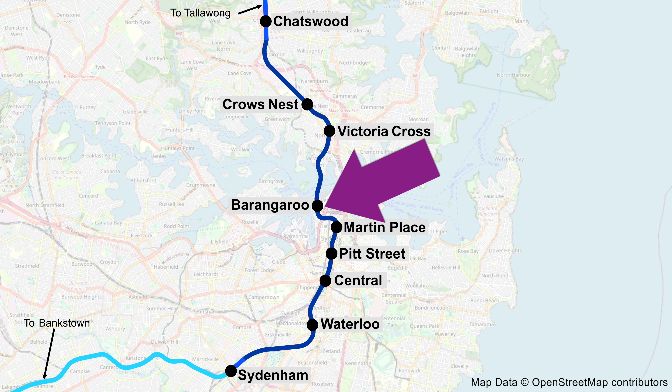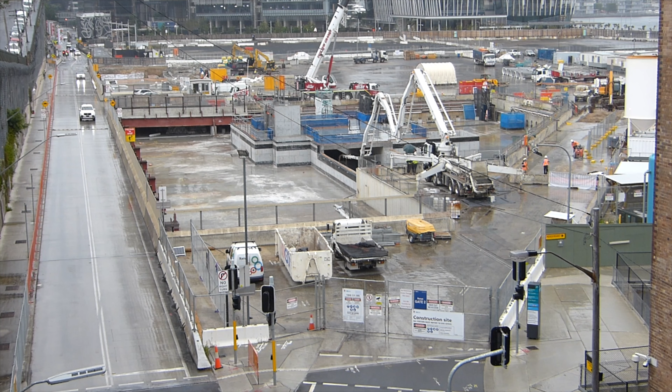Barangaroo is the first station on the south side of the harbour and is one of 4 stations in the central CBD area. Back in November 2021, this station had 2 distinct boxes that were separated by this bridge.

On the 26th of March 2022, this looked very different. The bridge has been completely removed along with the red girder that was supporting it.

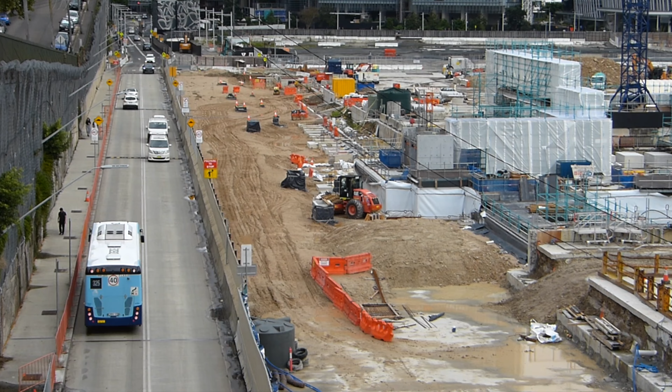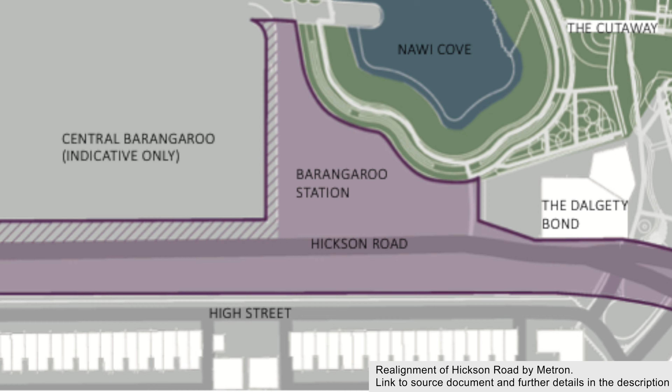The reason for covering the roof with sand is to enable Hickson Road to be realigned to run over the station box. Just before the High Street steps, Hickson Road will verge slightly left and then run over the station box. It returns to its original alignment just before the Munn Street Bridge.

The majority of the red girders that used to support the station box have now gone, but I did notice this one, which is supporting Hickson Road. I reckon that when Hickson Road is realigned, this one will go.

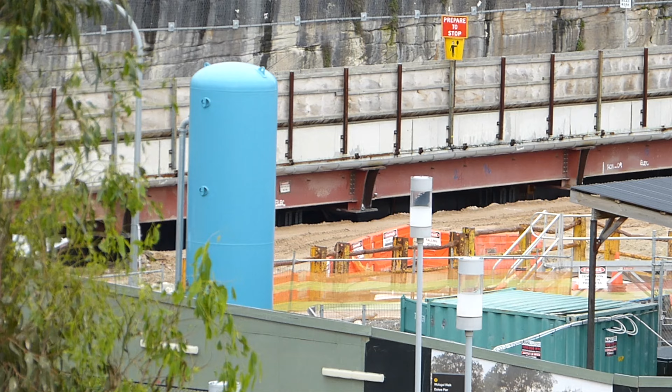Now looking down from High Street. Notice the surface water from the recent heavy rain.

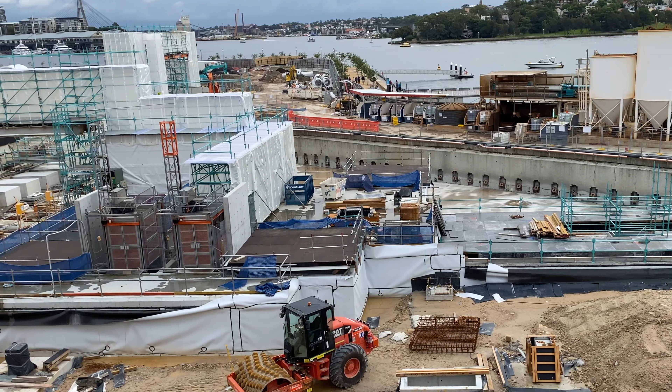This structure coming into view will be one of the station entrances. This is one of 3 entrances in total. I'll cover the likely locations of the other 2 entrances a little later in this video. This entrance will face north and have 3 escalators going down to the concourse below.

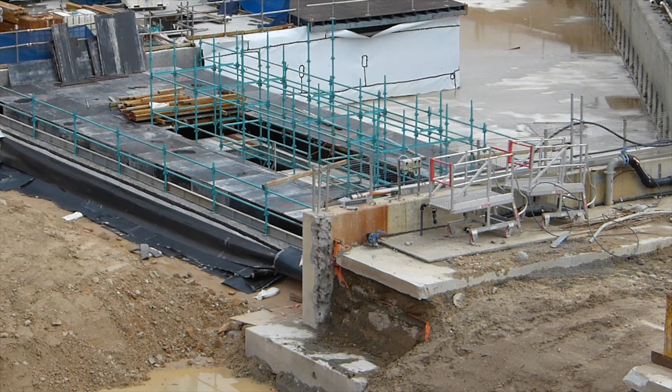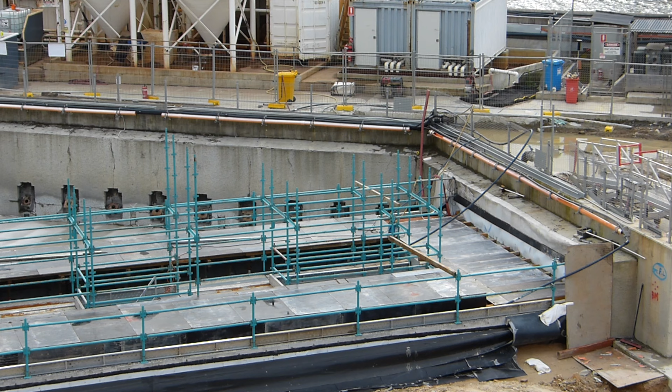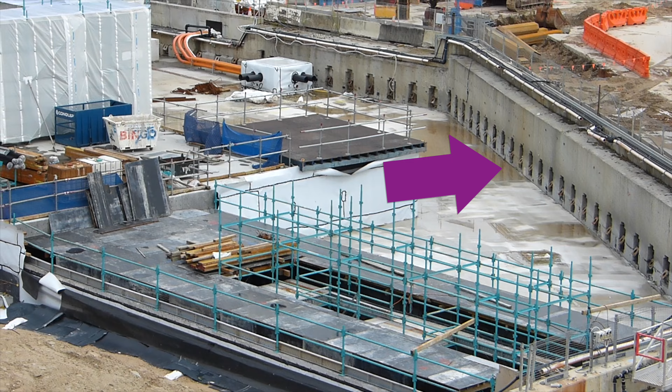The retaining walls for the station entrance area are still quite visible. Now coming into view is where the lifts will be.

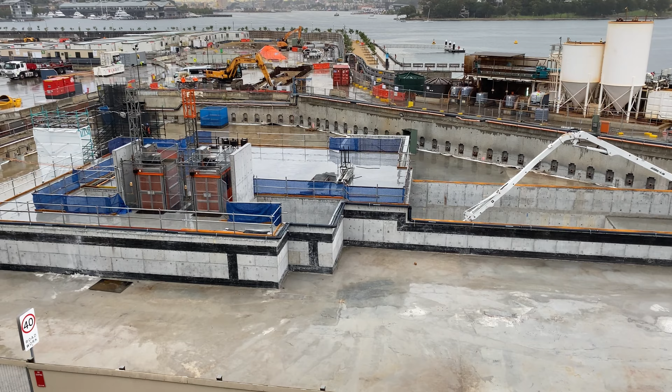In front of these station entrance buildings, some concrete structures are beginning to appear where the future Hickson Road will go. This temporary bridge coming into view now is purely for construction worker access to the lift and escalator entrances.

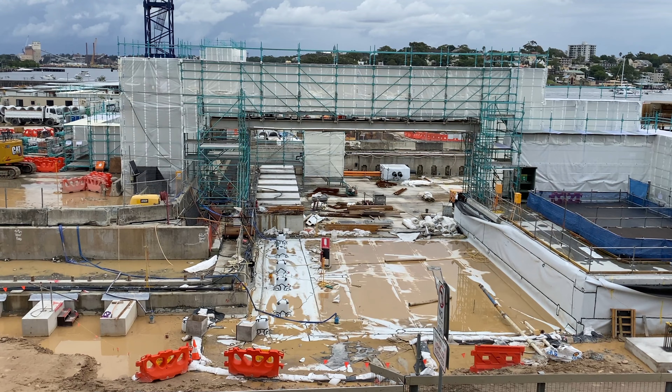I'm not completely sure what is happening below this temporary bridge. One possibility is that it's for a new road into central Barangaroo. Let's talk about this. Central Barangaroo will occupy this area here and possibly continue to the foreshore.

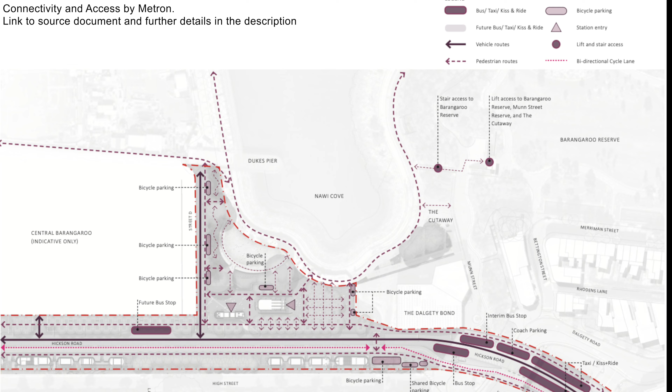At the moment, this space is part of the Sydney Metro construction site. Central Barangaroo will comprise of low-rise retail and office space and 2 underground retail levels, which may be part of a Westfield shopping centre. There will also be an additional entrance to Barangaroo station within this area.

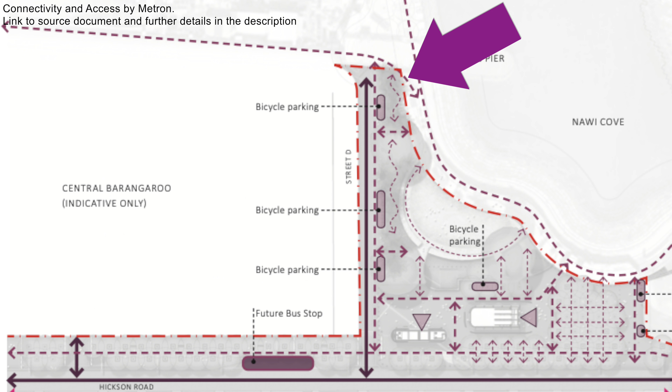This new road will be built to provide vehicle access to central Barangaroo, and there will also be a pedestrian path starting here. Whatever this area becomes, it is quite interesting from a construction point of view, so if you're a construction geek, you can help me out.

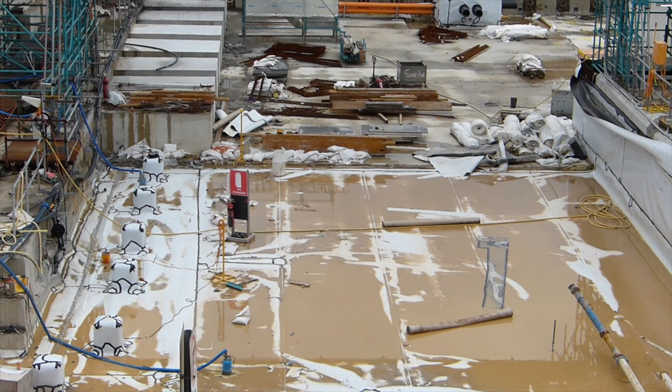Do you know what these knobbly things are for? Or the purpose of these concrete supports? Or what this might be used for?

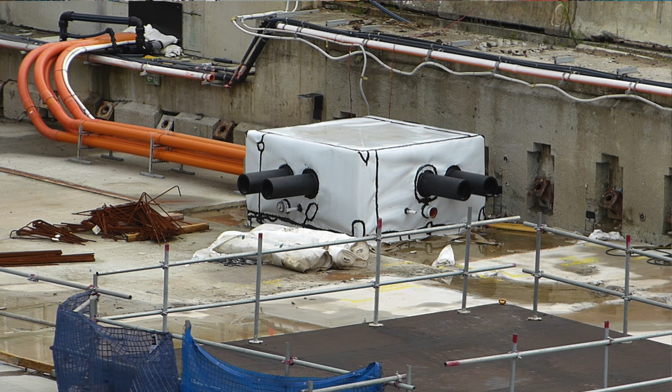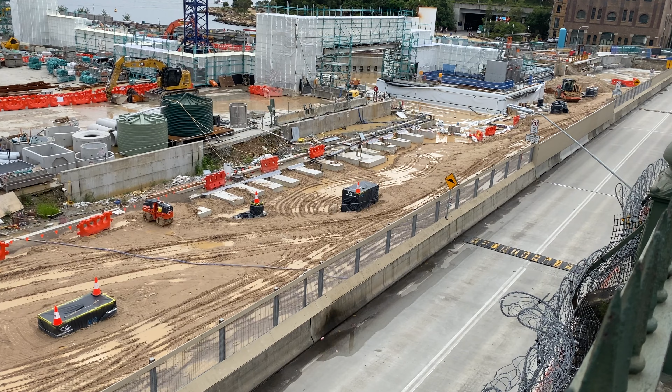Now continuing south, and you can see some more concrete supports that are probably for the realigned Hickson Road. So if Hickson Road is going to be slightly further west, then what will be in its old location?

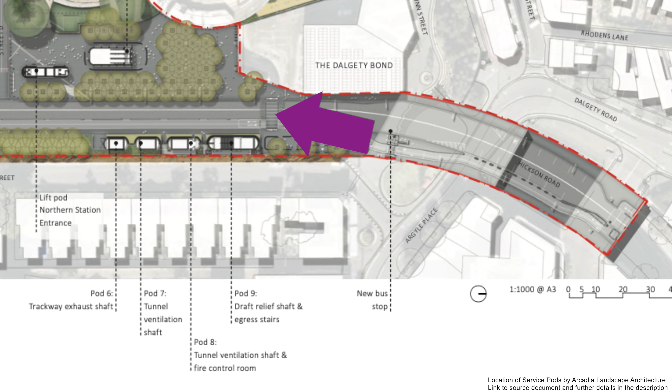So you'll have the heritage sandstone wall on the left, then the pods, then a separate footpath and bicycle lane, then Hickson Road itself and a pedestrian path on the other side.

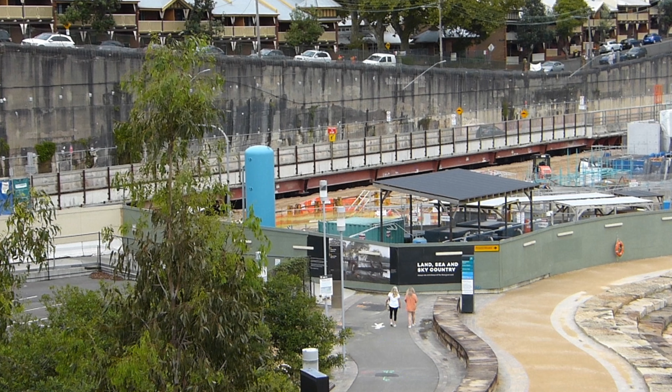So as these service pods will be next to this heritage sandstone wall, there will be a design competition to come up with suitable facades and screens that will minimise their visual impact and help them blend in with the wall and the pedestrian and cycle paths next to them. The end result may look something like this.

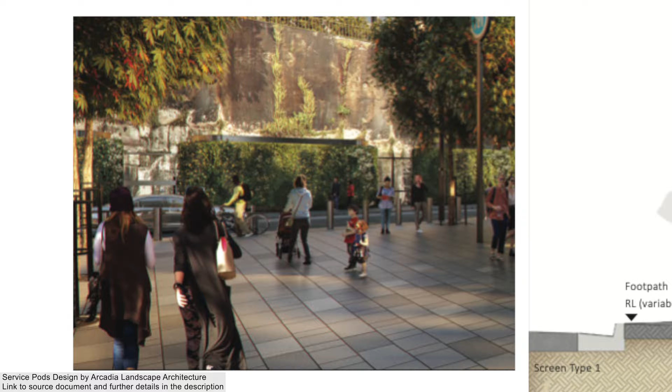So now at the south end of the station box, and if this looks a little boring, then do check out my previous updates, some of which happened before the roof was installed. I'll link to these in the description below.

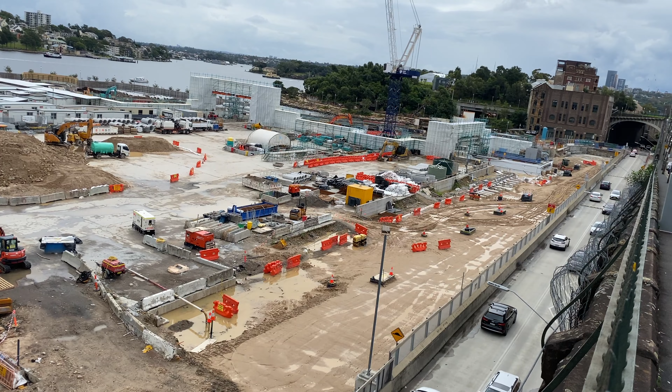You can see the future central Barangaroo area to the left. And this other temporary bridge is where the pedestrian path into central Barangaroo will be.

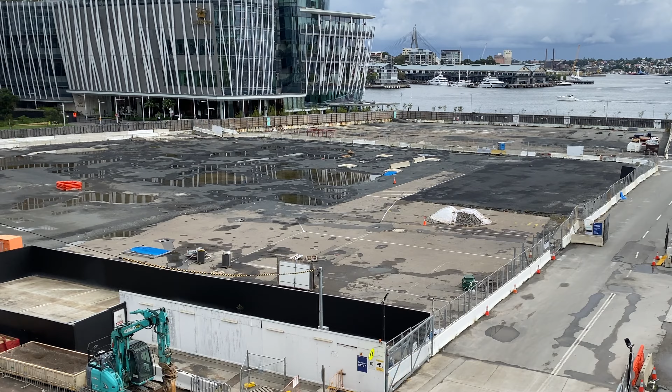This area coming into view on the left is currently being used for construction staff parking. This may well become part of central Barangaroo as well.

In this area, which is known as Barangaroo South, there are a couple of new office buildings going up. There will also be a station entrance in this area as well. So that's 3 entrances in total.

The entrance in Nawi Cove, which I covered earlier in this video, and then another entrance in central Barangaroo that may be above or below ground. And then a third entrance in Barangaroo South, which I believe will be close to Clarence Street, Kent Street and Jenkins Street.

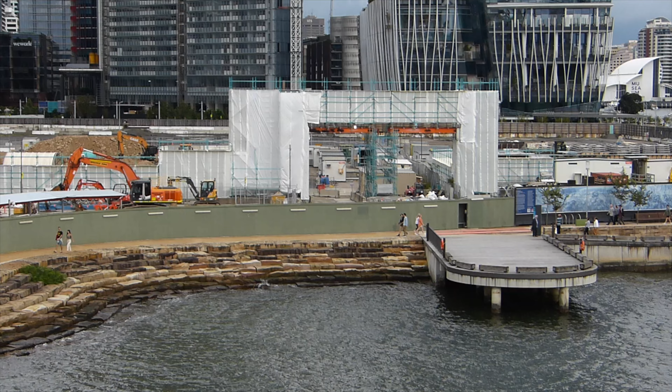Now looking from Barangaroo Reserve, and you can see this second temporary bridge on the right.

And now the back of the Nawi Cove lift and escalator station entrances, and the heritage sandstone wall with High Street behind it, where I did most of my filming earlier.

So that's the end of my update on the current Barangaroo station. I hope you enjoyed it and found it useful.